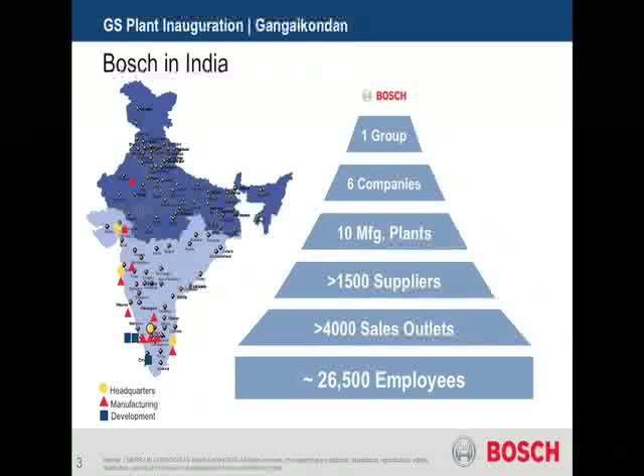Its operations are divided into 4 business sectors: automotive technology, industrial technology, consumer goods, and energy and building technology. Manufacturing facilities are located in Bangalore, Nashik, and Jaipur. With turnkey application capability and local project management, the division has always been future-ready, offering professional support to Indian and international OEMs by enabling them to meet current and future emission regulations. Bosch has a wide customer base in India.

The gasoline division of Bosch Limited commenced its manufacturing in 2008 with fuel supply module. The division is continuing to invest in systems and component engineering to develop complete locally specific powertrain solutions. The division's customer base is fast expanding and includes all major OEMs across the industry.

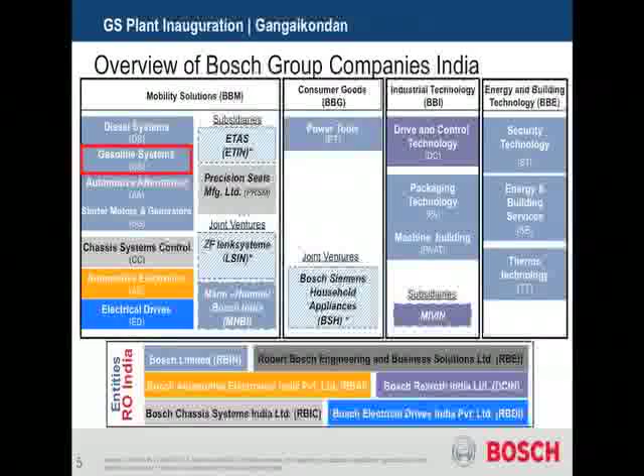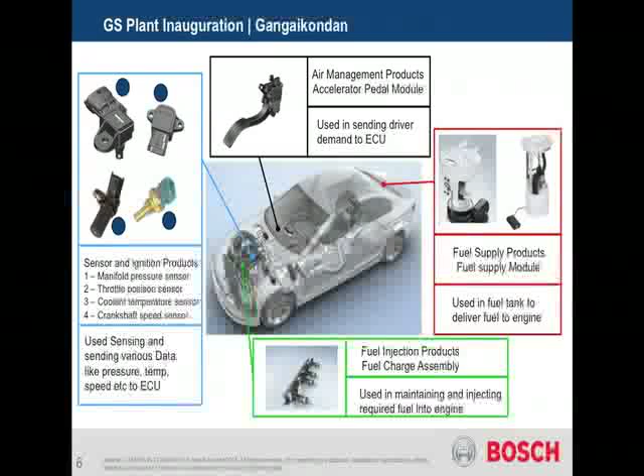In a measure towards fulfilling future expansion needs, a new greenfield manufacturing facility at Gangaikondan, Tirunelveli district, Tamil Nadu is being set up. Powertrain sensors used in passenger cars, accelerator module, fuel supply module, and fuel rail assembly are the main products being currently manufactured in India. The division till now was making these products in its Naganathapura facility near Bangalore.

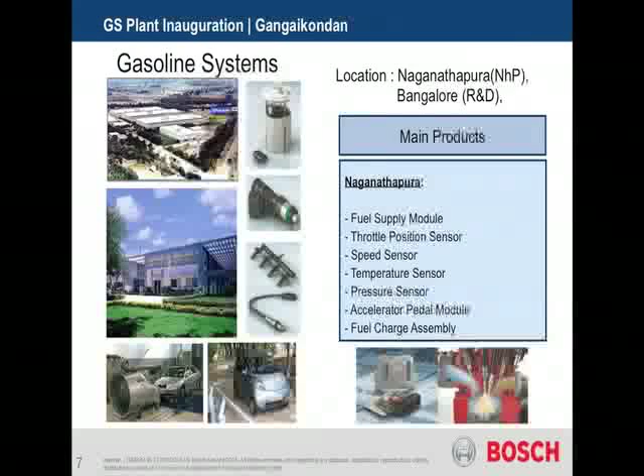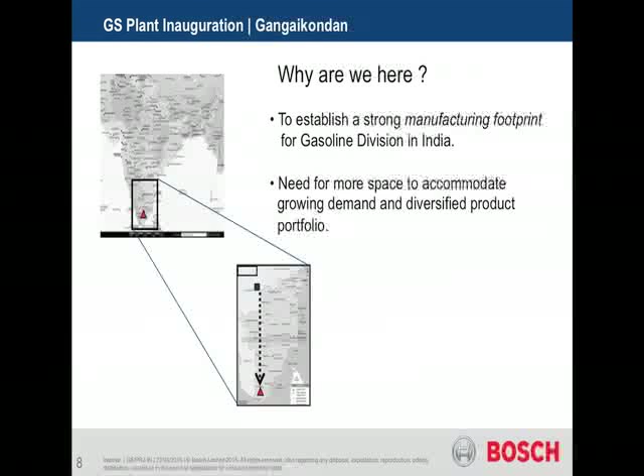With the gasoline division being set up in Gangaikondan, Bosch has added another manufacturing location in India to meet growing customer needs and with an intent to establish a stronger manufacturing footprint of its own. Gangaikondan location was chosen. The need for new location was felt as early as 2011. The leadership team took up the task of coming out with a location strategy that suited GS business needs. With an in-principle approval for the new location, a project team was formed.

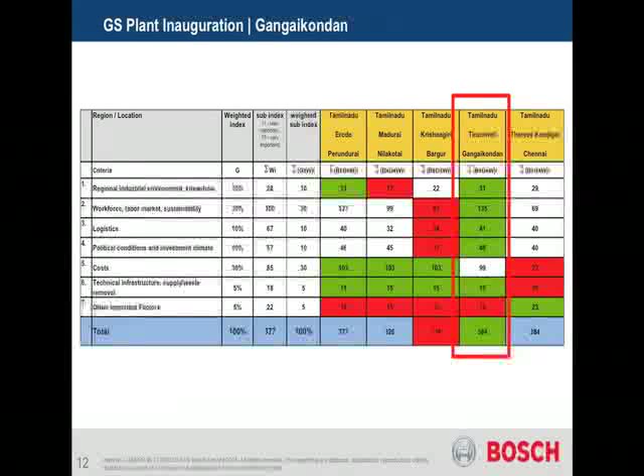Several locations were visited in the region of Karnataka and Tamil Nadu. Perundurai, Thervoy, Nilakotai, Gangaikondan and Oragadam were a few areas which were considered for evaluation. A systematic evaluation was jointly done together with corporate real estate team of Bosch. Gangaikondan was chosen as the most preferred area among all the locations. The site selection was validated by colleagues from both Germany and India. Sipcot Growth Center in Gangaikondan was finalized, considering the well-developed infrastructure and potential growth in the region.

An approval to invest in Tamil Nadu was given by the Bosch Board of Directors during early 2012. Bosch was allotted a land of 38 acres in the existing Sipcot layout, and the same was registered in 2013. This was followed by a series of internal and external approvals. In-principle approval for commencement of construction was accorded by the Guidance Bureau during the December month of 2013. The construction work began after the consent to establishment approval was given in the month of March last year. In a record span of 9 months, the unit became operational at Gangaikondan.

The journey for relocation and setting up a greenfield entity began in 2012 for the gasoline unit. It was important to keep the stakeholders informed about the relocation. A first communication on the relocation was given on the 19th of April 2012. Although it took a little longer for starting up the execution, the continuous engagement and communication with the associates was ensured. On the 1st of June 2013, a project core team consisting of 10 members was formed.

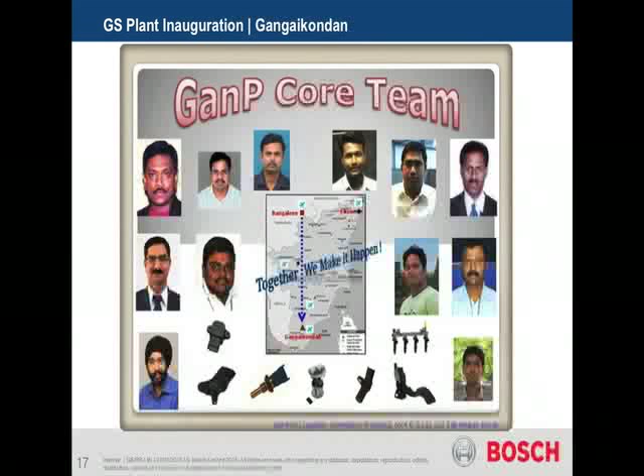The project organization also had a steering committee and review board with members from gasoline leadership and executive management. The core team members together came out with a methodology for the execution and review mechanism. A signature logo was finalized which symbolizes Greenfield Project of Gasoline Division in Gangaikondan, which is intended for growth. All the colleagues were kept informed about the project progress through regular info-sharing sessions and an info board in the office. A task force was formed to take specific tasks related to relocation and execute the relocation by adhering to specified guidelines and fulfilling all the project requirements.

On the 9th of October 2013, Bhumi Puja was performed and the first foundation stone was laid by Mr. Franz Hauber, the Joint Managing Director of Bosch Limited. The function was attended by several officials, neighboring industry members and local institutions. However, the construction activity was awaiting clearance from the Tamil Nadu Pollution Control Board and a few other necessary approvals like temporary power supply to the site. The CTE was accorded in the month of March 2014, after which the actual construction commenced on March 27th.

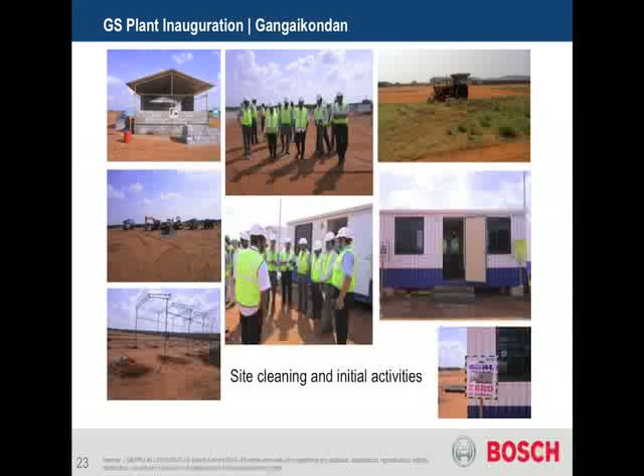Regular on-site reviews were conducted by the Bosch team to ensure the project was steered in the right direction. A temporary office was set up for the purpose of site personnel. In the month of May, as the construction activity started gaining momentum, a guest house was established in Tirunelveli to accommodate the frequent travellers from Bangalore. A temporary office was also set up within the Bosch guest house for the engineers who were sent as early birds.

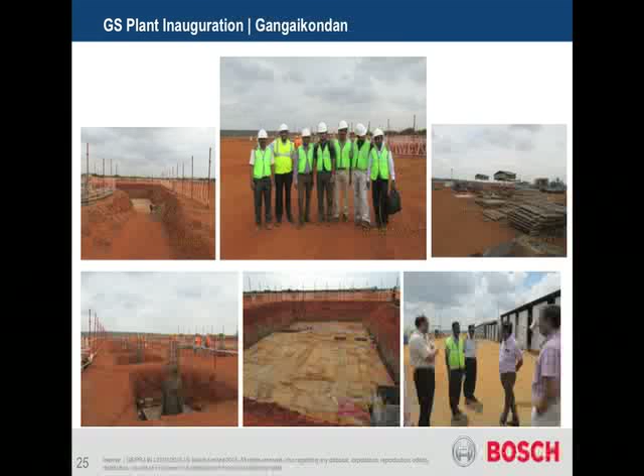The progress was monitored closely and reported to the Bosch management in Germany and other stakeholders who were keenly watching the developments. The reviews and visits were not only restricted to the site, the construction workers' accommodations were visited and unsafe acts were promptly brought to the notice of the concerned. Safety was given utmost importance and no shortcuts or deviations were allowed in the site work.

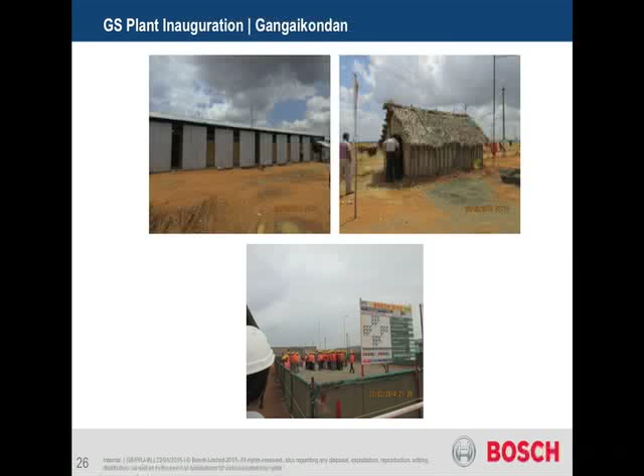Safety drills were a part of the work. The foundation work was carried out for the main structures in the month of April.

In the month of May, the utility building started taking shape along with compound wall fencing preparations.

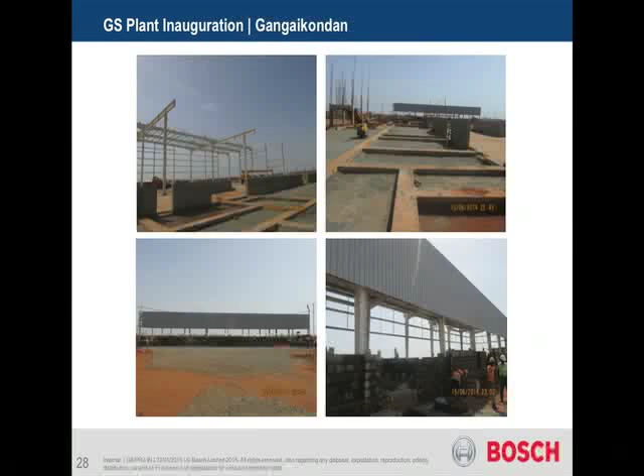Commitment to the cause of environment protection was demonstrated by the Bosch team by planting saplings as early as May 2014. We have a dedicated green belt within the premises and till date have planted more than 2,000 saplings.

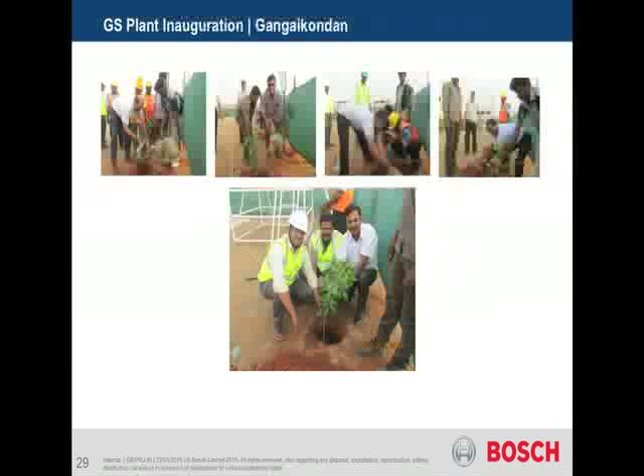The colleagues had to be away with or without their families for several days during the early days. Few moments were spent together with all the family members.

Apart from the on-site reviews, guest house meetings lasted for several hours in the late evenings to review work packages like HR, IT and logistics.

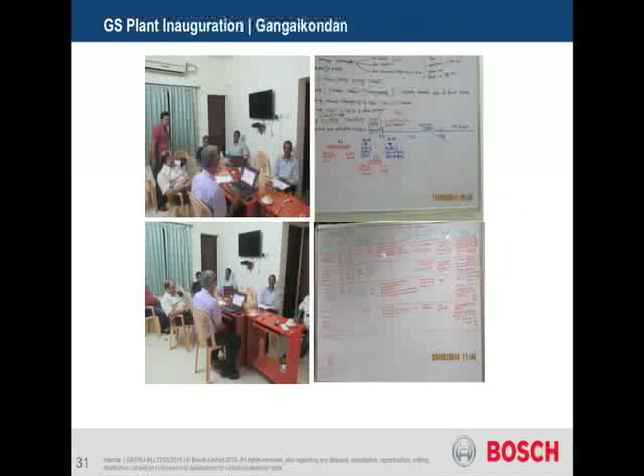Deep dive discussions with the leadership team helped to uncover a lot of potential problems and fix solutions upfront. Many work packages were put on track through these meetings and implementation strategy was finalized until May 2014.

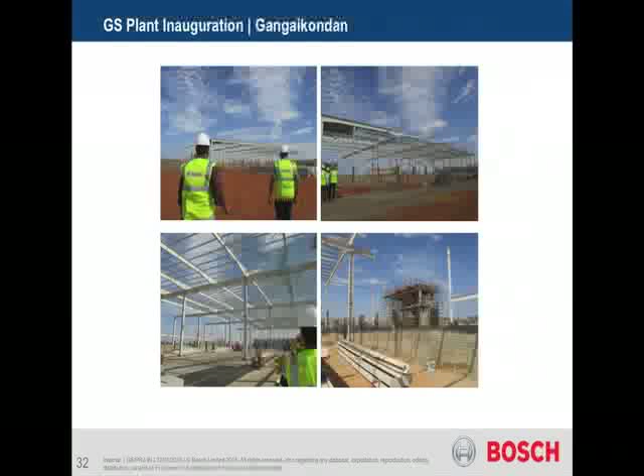The month of July witnessed rapid progress with respect to civil structures. PEB structures for the main hangar and utility buildings were erected during this time. Simultaneously, the civil work on the other buildings progressed.

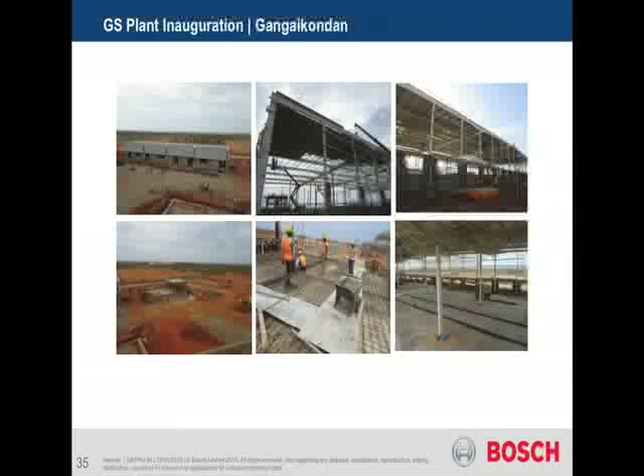Aggressive timeline targets for relocation and important customer project commitments were driving the entire project on a fast track. The relocation schedule was fine-tuned a few times considering readiness of the main hangar and necessary facilities, but a compromise on the end date was never made.

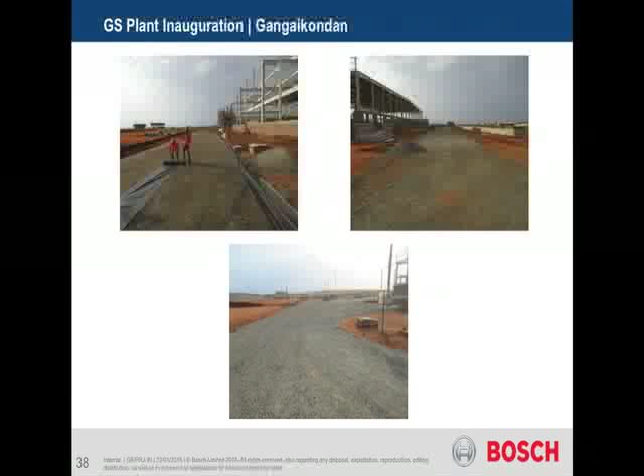During the month of August 2014, we were very close to the end of production at the Naganadapura location for a few lines, with the Gangaikondan plant still a long way to go for production worthiness.

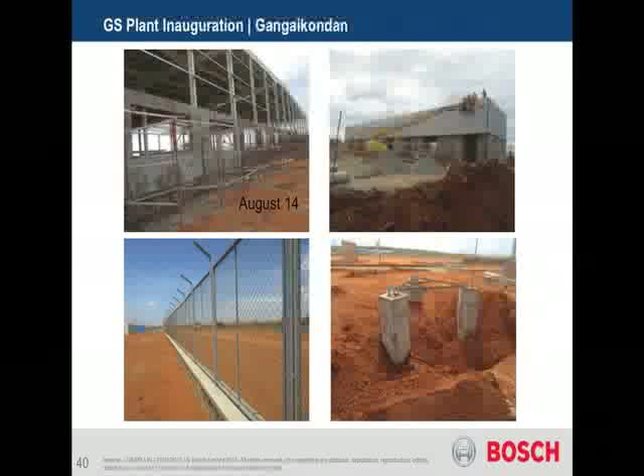The entire month of August saw a buzz of activities with respect to construction. The main hangar started taking a final shape.

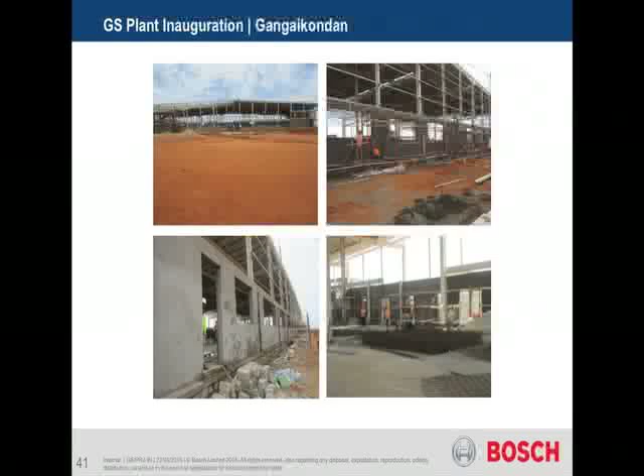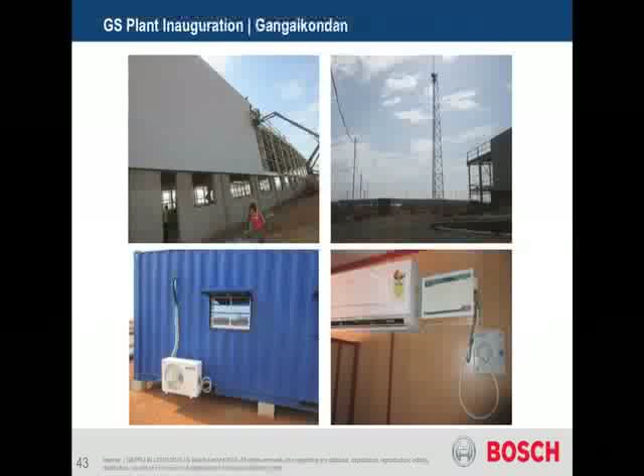A communication link with radio link was put up to support IT rollout in the month of September 2014. A batch of engineers had already started their work on site. Company transport started from the month of September 2014.

On the other side, it was time to wind up at Naganadapura. The first line producing fuel supply module was turned off on the 25th of August.

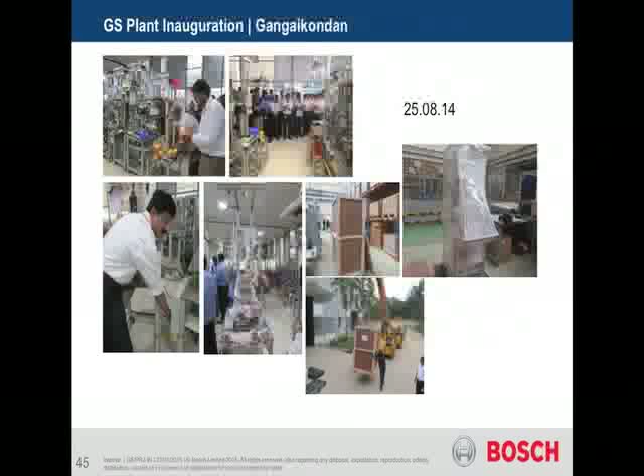The entire relocation process was handled by the Bosch in-house team of experts who took care of all key aspects of movement and ensured our machinery was fit to start in one go post-relocation.

To engage local talent post-relocation in the manufacture of parts, many job fairs were conducted in the local region with specific selection criteria. The response was overwhelming and as expected, aspirants responded enthusiastically. The first team of associates was selected in August.

The selected associates were trained on various aspects using the customized training module for a period of 1 month. The training included simulation of real production environment supported by adequate theory inputs in the classroom.

The first line made an entry into the production hangar in the month of September. It was challenging to simultaneously carry on relocation and finish the construction work.

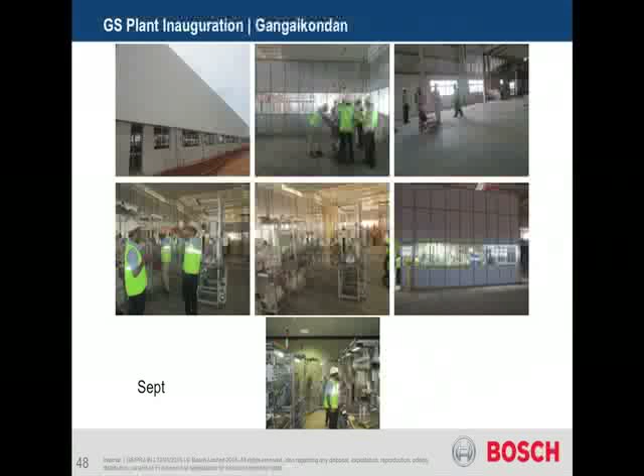Enclosures were made ready to insulate the production lines from the surrounding dusty conditions. Very stringent measures had to be put in place to protect the dust-sensitive products.

The lines were commissioned in record time and consent to operate was obtained in October. Following this, the first commercial invoice was made from the Gangaikondan location in the month of November 2014.

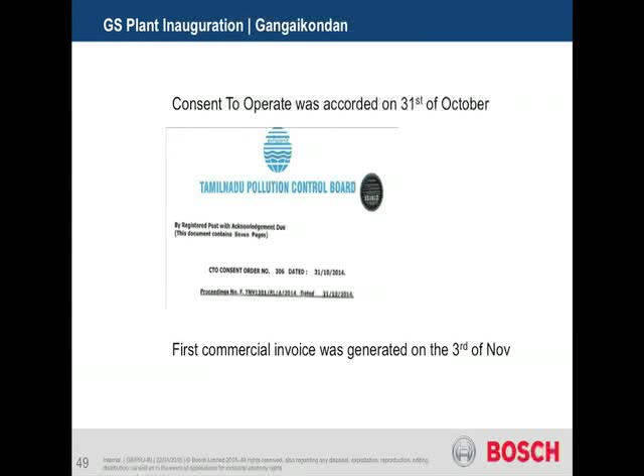In order to commence production, a captive power generator was put into operation while the electricity board power line was being drawn.

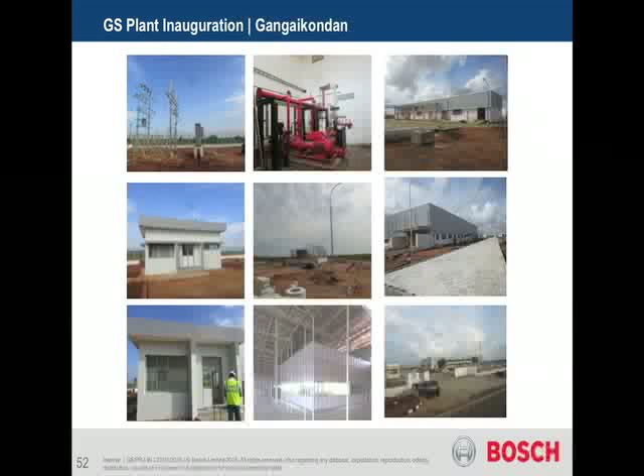November and December months witnessed further developments with respect to the main hangar and support facilities. More assembly lines were brought from Naganadapura to be commissioned at Gangaikondan.

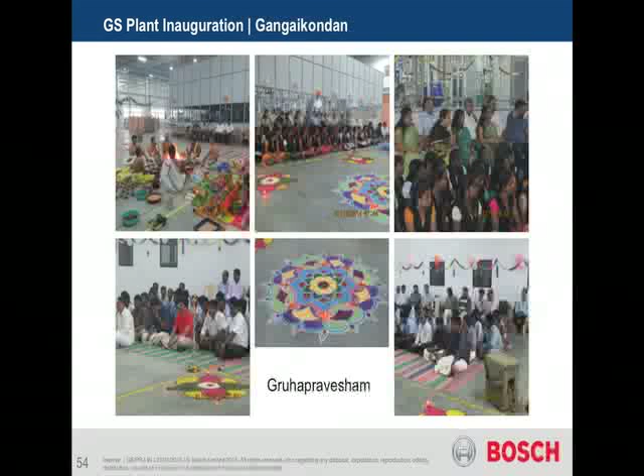On the 1st of December, the Gruhapravesham was held. Thus, the dream of building a GS plant was realized. This was made possible by the trust GS management had on the team, the support of our esteemed customers who were with us during this transition, the business partners and vendors.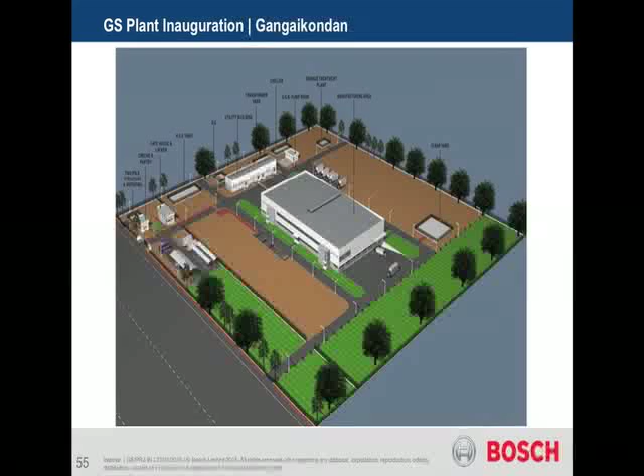The plant has a built-up area of 6,400 square meters. The single production hangar has an area of 3,500 square meters.

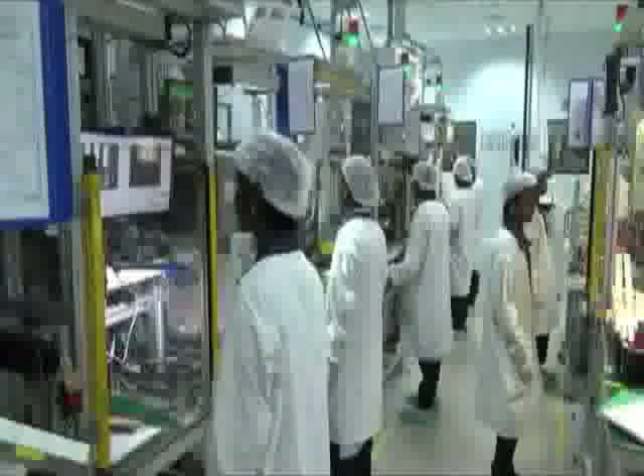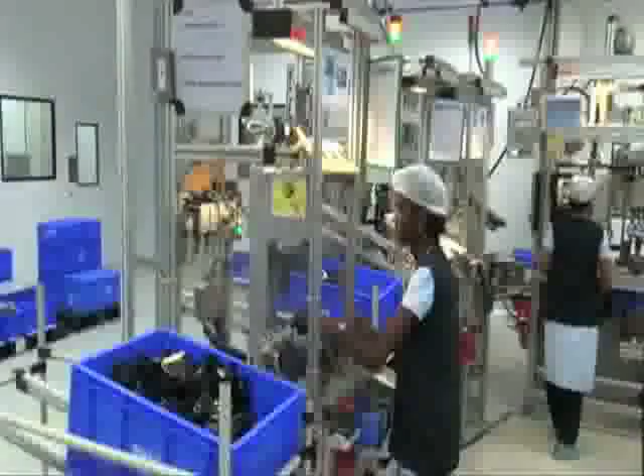The production facility includes a sophisticated sensor production line, which has been built specially and operated with controlled conditions of temperature and humidity. Other assembly lines are built based on the Bosch production system, which takes care of ergonomics and single-piece material flow. Associates are sensitized about quality requirements and well-trained before they are put to work.

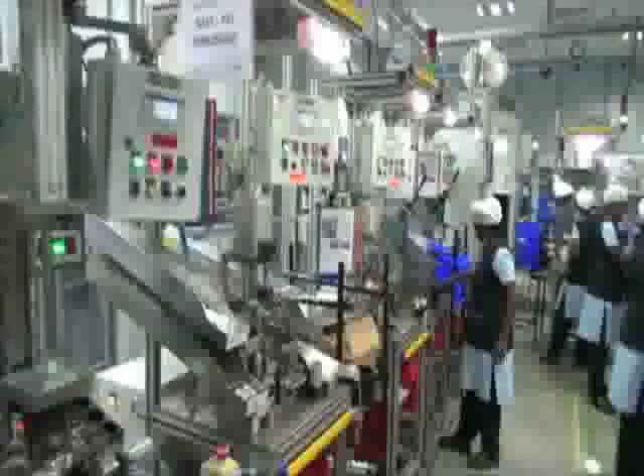The production hangar also houses both receiving and shipping area.

Apart from the TNEB supply, the plant is equipped with 100% captive power generation capability. This conforms to the standards set by the TNPCB.

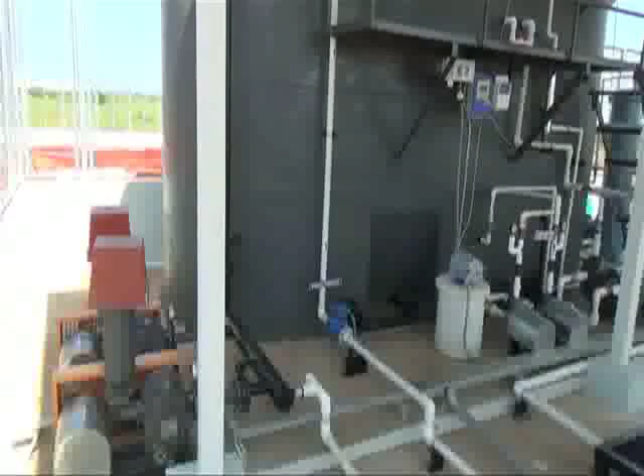The unit is a zero discharge plant and does not generate any effluents. It has a sewage treatment plant which is capable of treating 25 kiloliters per day. The treated water is used for gardening in-house.

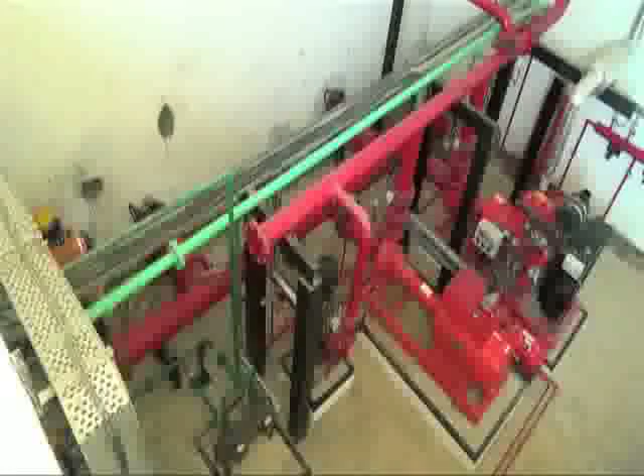Besides, there is a pump room which is equipped with a full-fledged firefighting system. The pump room also has a water treatment plant.

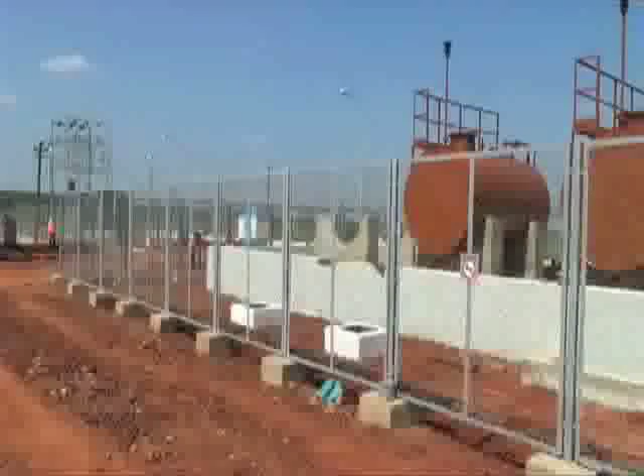The utility building houses compressors, electricity panels and chemical storage rooms. Generator and transformer yards are built taking into account future expansion. The facility also has a diesel yard that can hold 20 kiloliters of diesel for captive operations.

The cooling requirements of production lines and offices are met by a centralized chilling unit.

As a part of welfare, a creche building is built with an intention to support lady employees.

Adequate parking facility has been provided for both two-wheelers and four-wheelers. Besides, the employees can use the locker room facilities.

The office area, both on the ground and first floor, is built with spacious workstations, an in-house training center, a reception area, and a quality laboratory are part of the hangar, apart from a canteen and conference room.